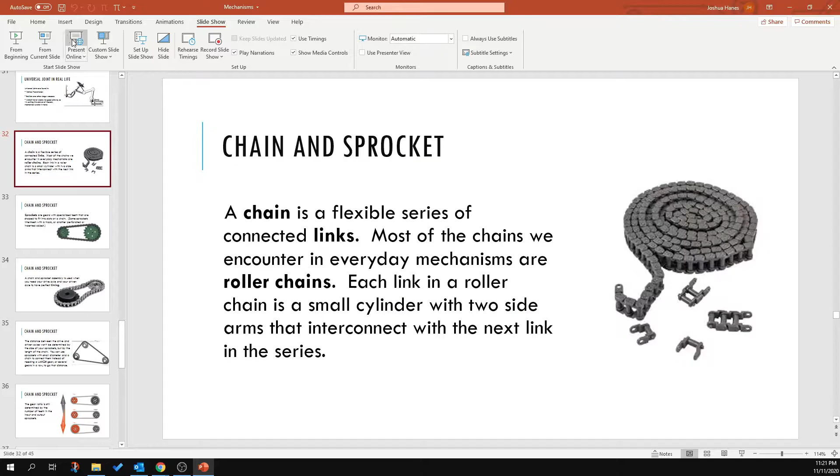A chain is a flexible series of connected links. Most of the chains you're going to encounter in a mechanism are going to be roller chains. Each link is like a little tiny cylinder, and on the sides you got two arms that'll connect it to the next link and so on. So you got the same little shape over and over again. When you hook them together, it is a chain.

Sprockets are gears with special teeth, and they are shaped to fit in the slots in a chain. So if you think about these being little cylinders, the little cylinder should fit in each of these like a little pocket as it goes around. Now some sprockets do intermesh with something that's more solid, like a track, something that's perforated or indented, so it's got holes in it or dents in it, so that'll roll along like that. But for our purposes, we're going to be talking about chain and sprocket.

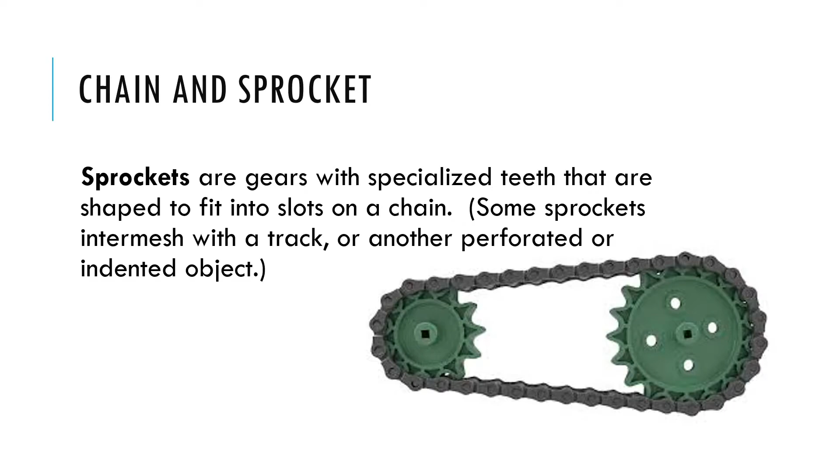So a chain and sprocket is going to be used if you need your drive axle and your driven axle to have perfect timing, be perfectly in sync. A lot of assemblies could use a pulley and a belt, but pulleys and belts can slip if they are not perfectly calibrated or if they're getting any wear and tear. So the chain and sprocket is one way to fix that.

And the cool thing about chains and sprockets, actually there's a lot of cool things. One of the cool things about chains and sprockets is that you're no longer limited by the size of your gears. If I need the gear ratio to be like 1:1, I don't have to worry about the size of my gears, having a large gear and a small gear because I need to space them out, or having several gears in a row with all these idler gears moving in between. I don't have to worry about that.

I can use sprockets with the diameters I need them to have, and I can just connect them with a chain instead of trying to piecemeal hundreds of other gears in between them, or trying to get a giant gear to connect to a smaller gear somewhere else. And so where you need your axles determines how far apart things are, and the chain just connects them.

This is a SolidWorks. I used to use SolidWorks. I'm kind of jealous that other people still use it.

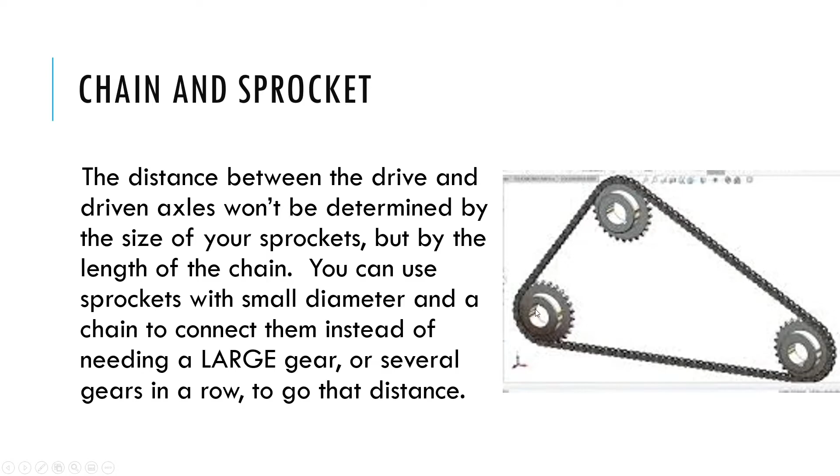Really quickly, because I didn't put it in this actual presentation yet, every single one of these sprockets here, all of their axes are going to be parallel. They're all sticking in the same direction, no matter what. These ones are kind of both vertical. These guys are all going straight towards you. So that's how that works.

So for links, the way we've got links, it's usually pretty simple to add or remove the links. Otherwise, you're not going to get the right length. Here's just some examples of links. It looks like I can attach things to these guys. There's holes to put bolts through. Here's a regular old roller link. Here's some with holes to attach things to.

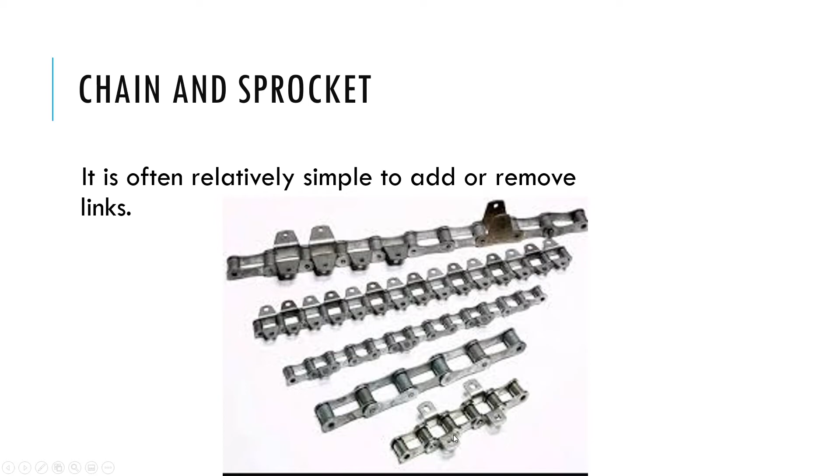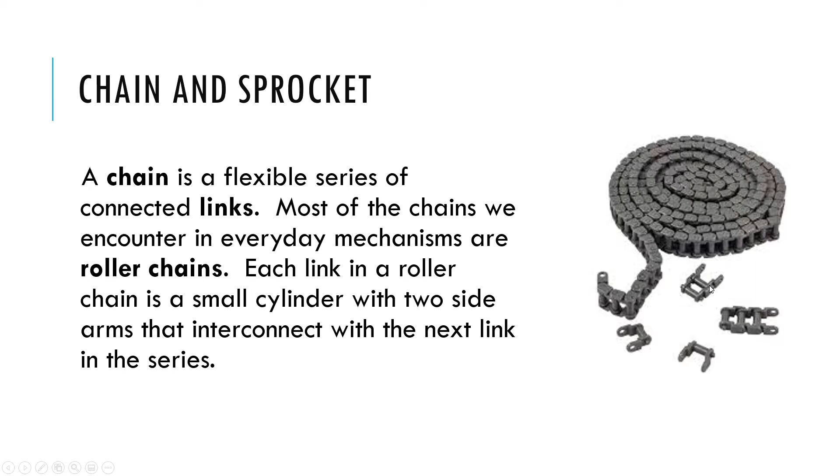So there's your links. If you look at the Vex ones, like these pictures here, this is made of plastic. And so if you can get a fingernail slid in between this arm and this cylinder part of the other guy, you can sort of just bend them very, very gently and they will come right apart. You can add or subtract links as needed.

Alright, so let's keep in mind a couple things. First of all, your sprockets are never going to be meshed together directly. Their teeth and the gaps between the teeth are shaped specifically for the little cylinders in the chain. They're not shaped to turn each other directly by touching.

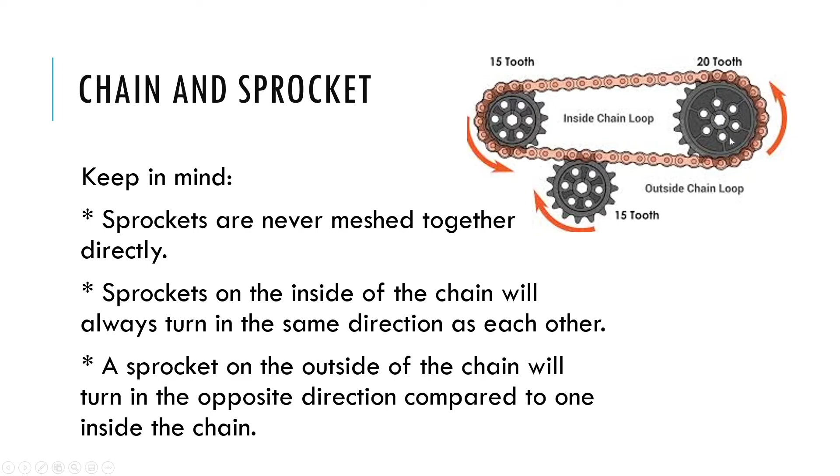If you've got sprockets that are inside the chain, they're always going to move the same direction. So if the chain is going counterclockwise, then this gear is going counterclockwise, then this gear is going counterclockwise. If you have a sprocket on the outside of the chain, though, that one's going to go the other direction. That one's going to go clockwise while these guys are going counterclockwise, and vice versa.

So where can we find these in real life? There are actually a lot of uses for them. Most of the ones they cite on the internet, when I was looking for examples, were vehicles. So bicycles. This is just a simple bicycle with a chain going between two sprockets. One sprocket, the drive sprocket, has the pedals on it, and the driven is down here making this wheel turn.

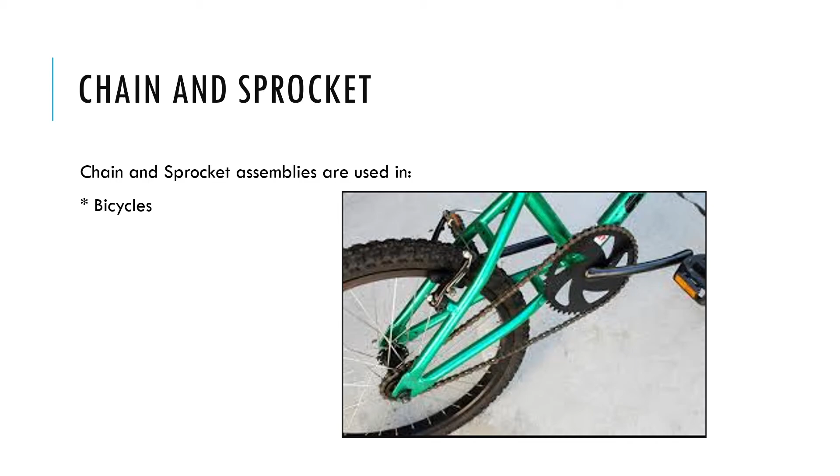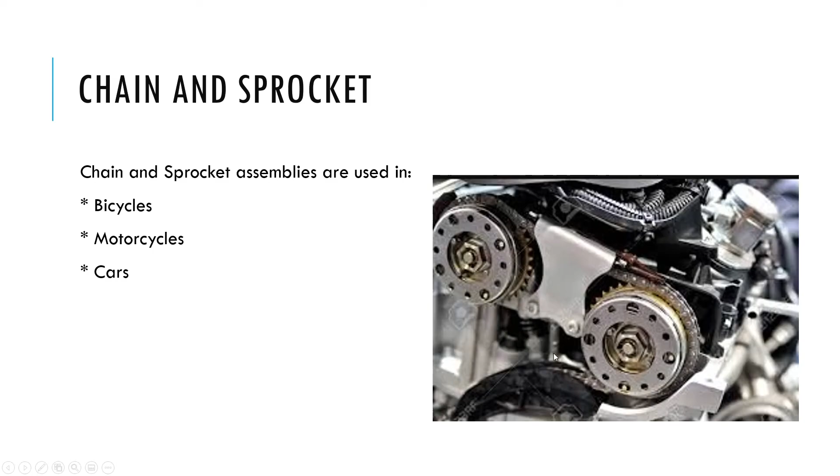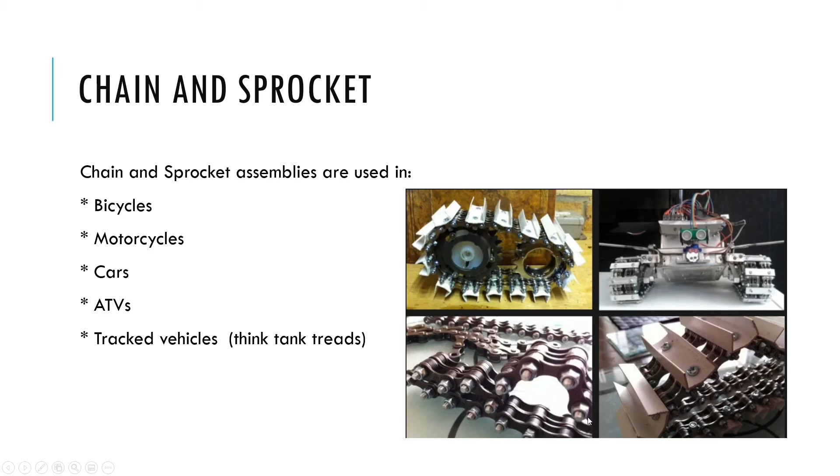You've got them in track vehicles, like if there's a tank with tank treads. Here's some sprockets, and on each one of the links there are these flat pieces, and these ones have little edges they can grip with. Here's only just flat pieces. Tank treads. Conveyor systems. You can have them go horizontally.

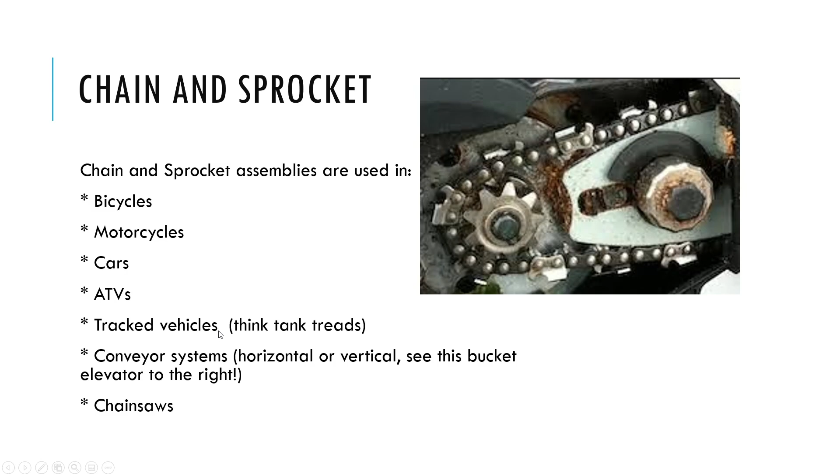And something I thought of was chainsaws. There's a sprocket inside of here, and on these links there are sharp teeth, and that's how chainsaws work. So there are a lot of uses for these things. You'll find them in plenty of places, mainly vehicles like bikes and motorcycles.